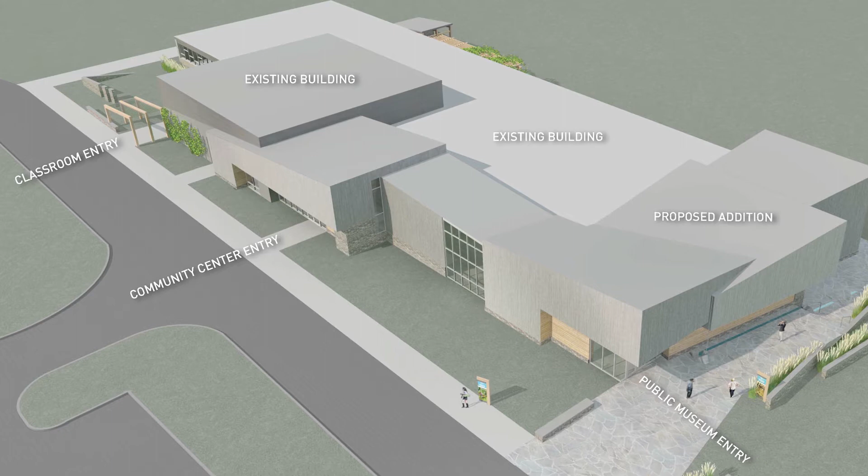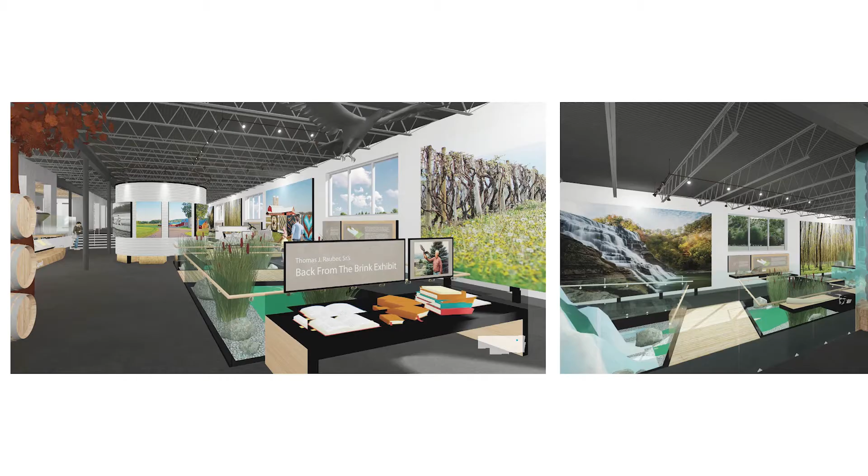The solution includes a 5,300 square foot addition which wraps around the southwest side of the 17,000 square foot existing building. The addition connects a new public entry lobby to the community center, formerly the gym, which will be used for education, visiting exhibits, and events. The plan also includes 7,000 square feet of indoor exhibit space, a classroom, retail areas, and support spaces.

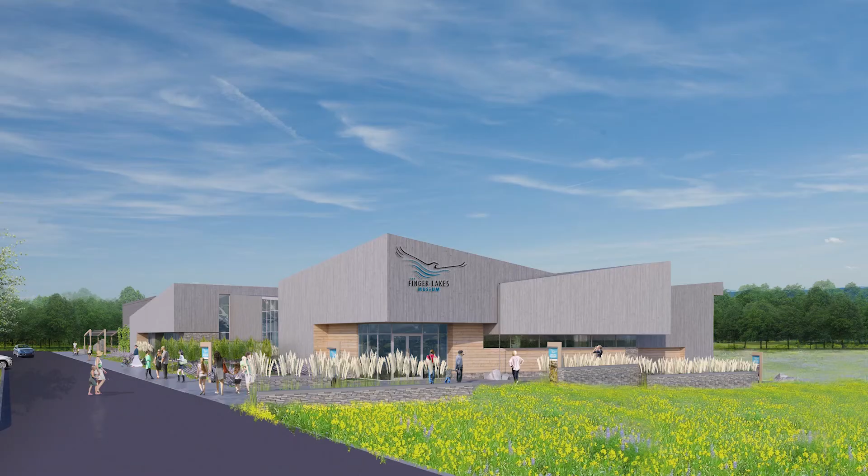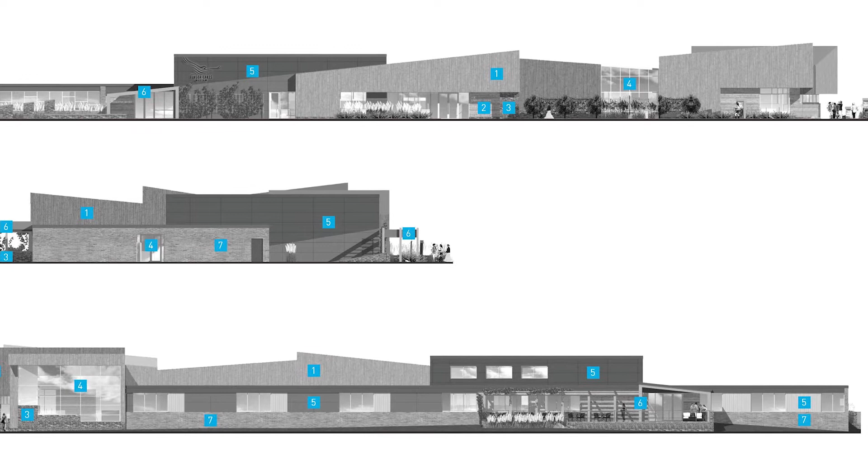Using undulating forms and natural materials inspired by the region, the addition interprets the story of the Finger Lakes. The building forms are layered and rotated to create depth and mimic the surrounding landscape. The organic organization of the forms provides focused views and opportunities for the surrounding landscape.

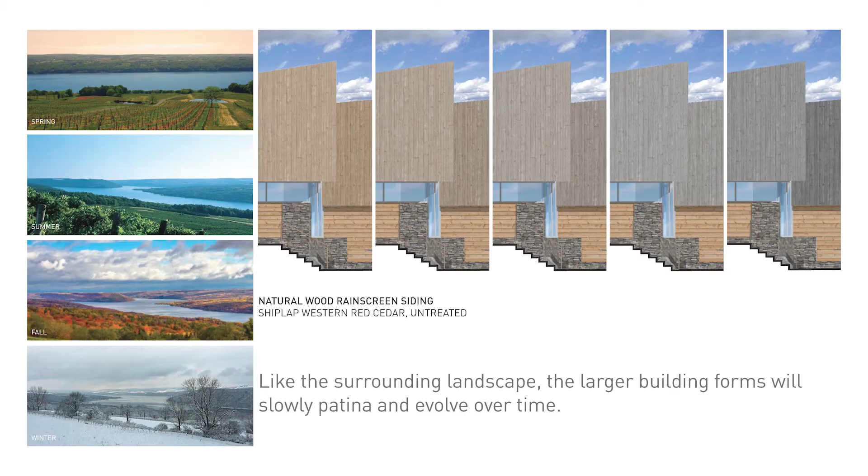The addition includes 5 distinct masses, which recall the 5 original lakes. The arrangement and sizing of the forms also recall erosion and the glacial carving that shaped the region. Materials change at these locations, reinforcing this effect, and the building will slowly patina and change over time.

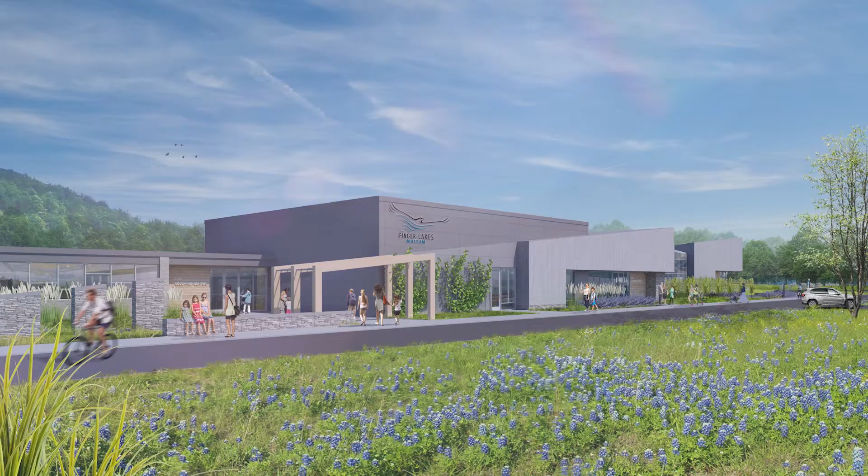An exterior entry patio and exhibit space highlight systems of rainwater capture that will help demonstrate the water cycle to visitors and assist with stormwater management. Sustainable building materials such as steel structural elements made from recycled materials, reclaimed wood, and locally sourced stone support sustainable design and demonstrate environmental stewardship to visitors.

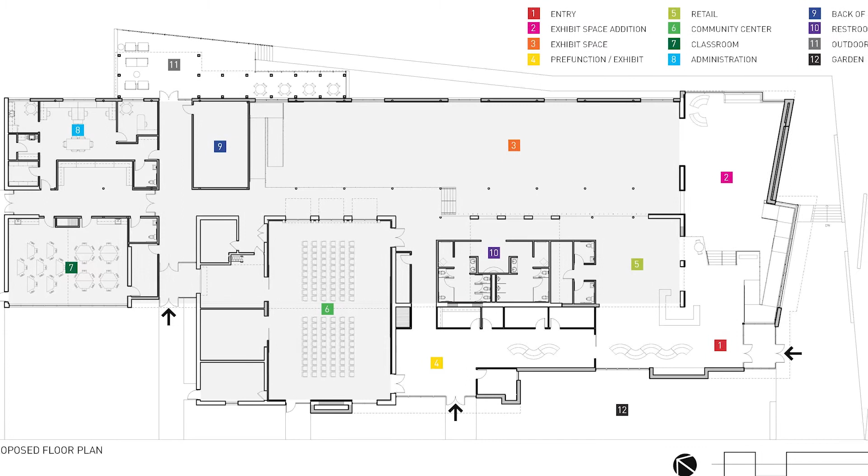Jury's comments: This unbuilt renovation is a great example of transformation inspired by context. The entry's well-documented evidence of contextual reference enabled the jury to read the project's landform-inspired design process and clearly respond to the project's intentions. A thorough investigation into the materiality, weathering, and development of a patina is essential to the project. The project's reach for direct connection to its surrounding and varied massing created a firm sense of place. The submission's clarity and thoroughness was well received and appreciated by the jury.

The client required an overall design aesthetic that was modern, monochromatic, high contrast with natural and authentic materials. Simultaneously, they wanted to allow their employees freedom to choose their work style and provide their clients a comfortable and visually exciting space to visit.

The highly experimental design is based around the 900 square foot monumental stair. The stair eliminates the disconnectedness the agency experienced in their prior location and serves as a gathering space with full audiovisual capabilities for all 175 employees to come together.

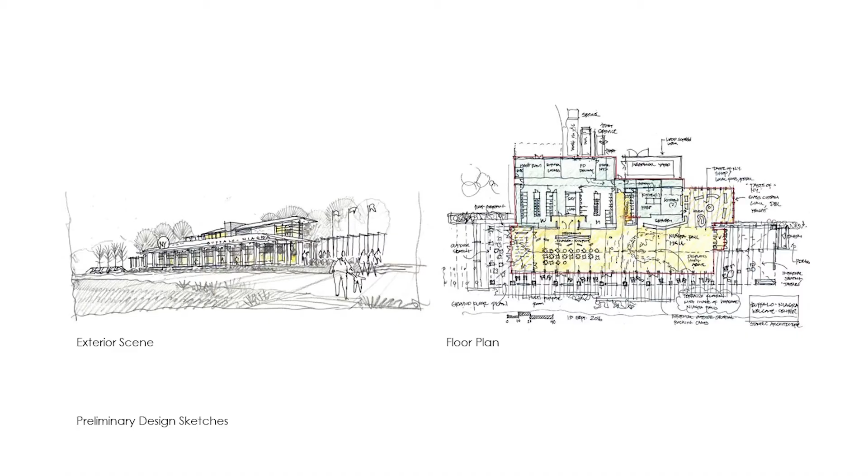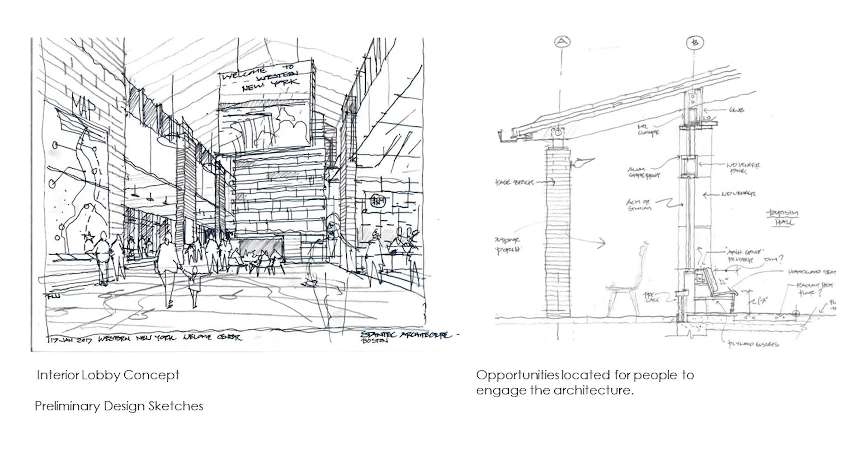The building draws inspiration from Frank Lloyd Wright's prairie-style architecture, with roots in the heritage of Buffalo, New York. The single-story building is centered by a high, vaulted lobby with sections for dining, tourism, and services.

Features include the entrance lobby with exhibits, Taste New York Market, facility vending, and indoor-outdoor seating areas. The main entrance is one of many areas designed with Wright's principles in mind.

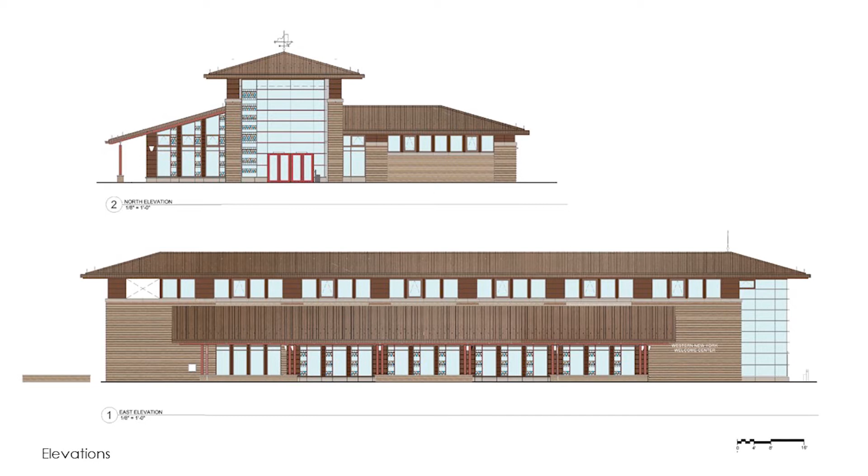The lobby's signature feature is a tall, internally lit glass lantern with overtures to Frank Lloyd Wright's ideas of light and space. The landscape and the architectural design work together in the spirit of Wright to deliver a seamless expression between the indoors and outdoors.

Outdoors, the site incorporates a child play area and a pet comfort area.

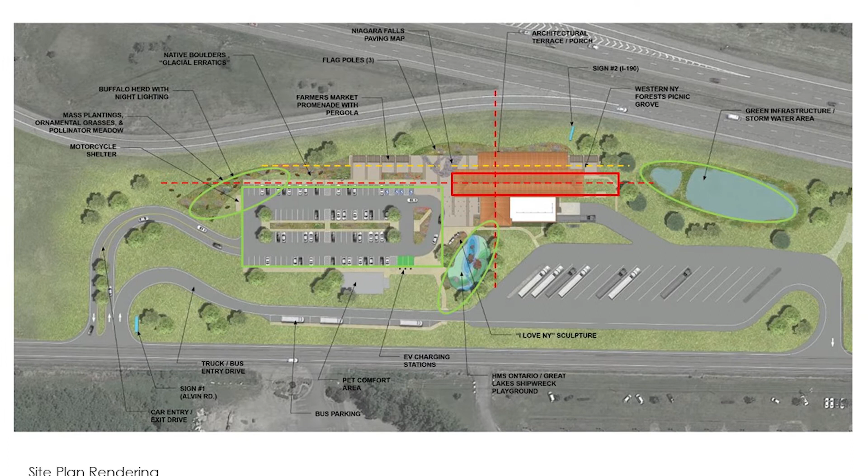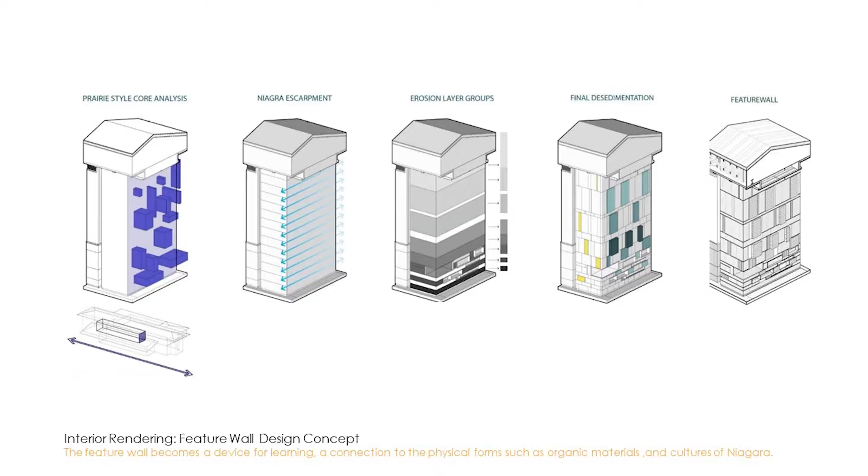A specific programmatic challenge involved creating a facility of this scale that still maintained the proportions of a prairie-style building. The team worked meticulously throughout design, studying other prairie-style buildings to influence the proportions of the building's windows and massing. Special attention was given to the Welcome Center's architectural details, both exterior and interior, to align with the quality and structural themes inherent to the goals of the project.

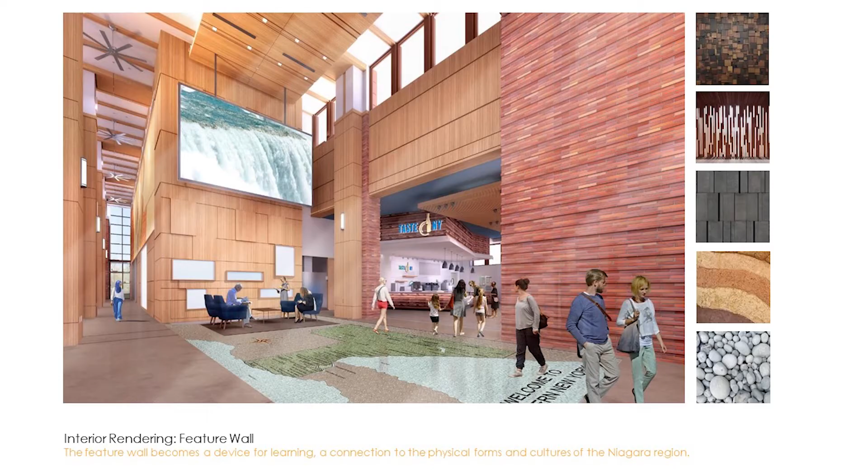Sustainable design is rooted in Wright's philosophy of balancing a natural and local world with modern technologies. The facility includes BMS-monitored natural ventilation, radiant floor heating, rainwater harvesting, day-lit spaces, locally sourced materials, and electric vehicle recharging stations. The project was developed to minimize environmental impacts and is eligible for LEED certification.

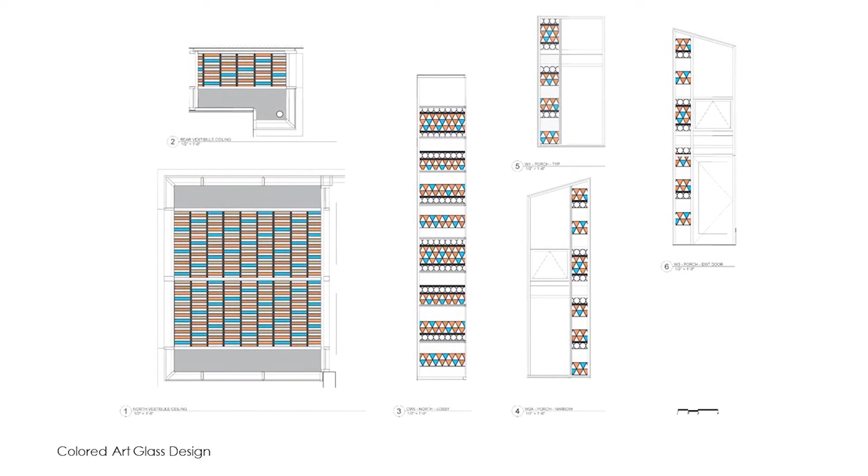Jury's comments: The Western New York Welcome Center is a refreshing and inviting building inside and out. Its bright interior and well-detailed fenestration bring in copious amounts of daylight, creating an inviting and warm space for visitors. The elegant interior details complement the exterior design while maintaining an overall similar design language.

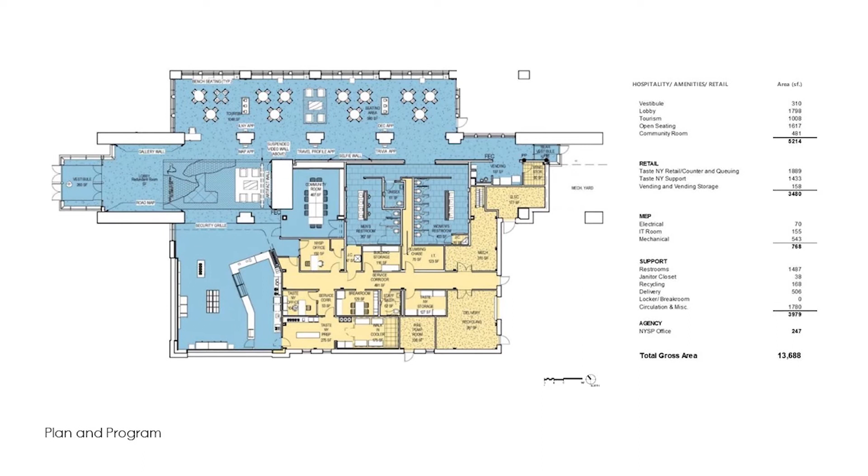A warm and inviting palette, specific choices of material, and an in-depth analysis help the designs blend together seamlessly. The thoroughness and consistent design direction based upon the prairie-style design ethos clearly carries throughout the building, expressing itself with specific shapes and colors while finding an original and modern balance.

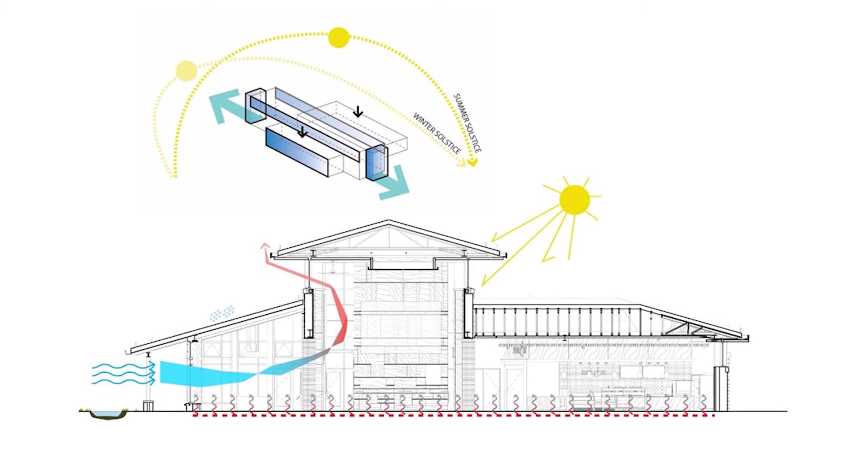The extensive sketching and diagramming of the submission helped clarify the design's intentions and successful execution to the jury. Both its aesthetic and design technical reach in terms of sustainable systems make this project an excellent example of the AIA's framework for design excellence.

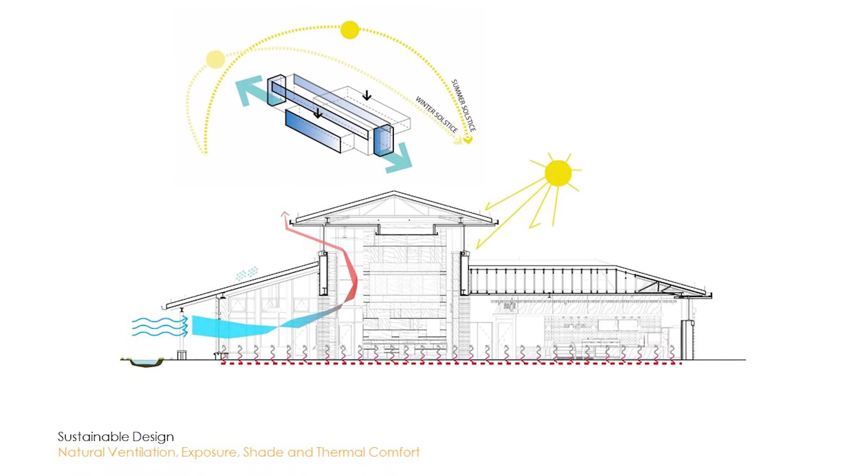The People's Choice Award goes to Edge Architecture for Mindex, 250 Alexander Street.

Mindex Technologies needed a new space, and they wanted it to be in one of Rochester's vibrant urban neighborhoods. They also wanted the design to reflect the high-tech nature of their company, while creating a warm, welcoming, flexible environment. City, but safe. Technical, but warm. And with lots of light. Edge Architecture said, no problem.

The mixed-use residential office building was designed in a holistic manner, combining the tech focus of the client with modern urban design principles. At 78,000 square feet, this 4-story building is one of the first in Rochester's downtown innovation zone. Together with Buckingham Properties, Mindex conceived of a building that would meet business needs while providing a compelling residential offering.

The perfect work-life balance. The neighborhood inspired exterior details such as brick, punched windows, and front porches. Materials included wood siding, masonry, and dark metals, producing a look that breaks up the mass while adding visual interest. It is a modern but yet timeless building.